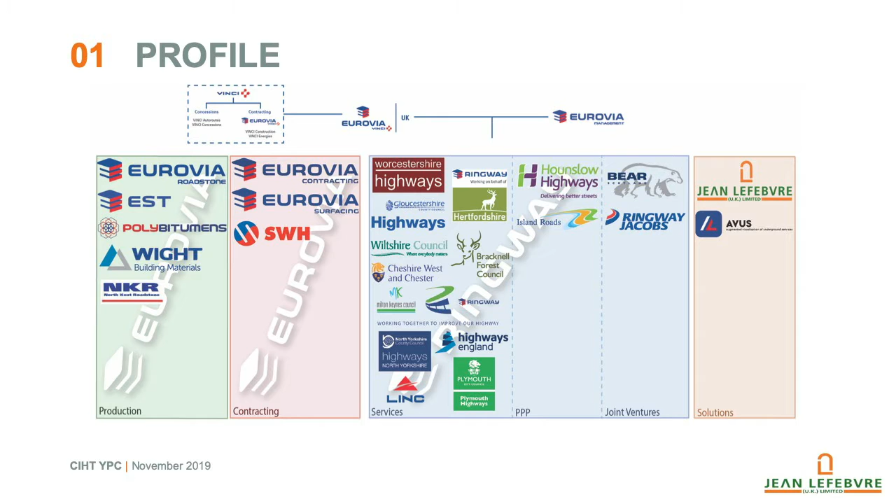So quickly, I'm from Jean Lefebvre, which is the consultancy division of Eurovia in the UK, and we cover all aspects of highway materials really. So material production and design, contracting, some term service and PPP or PFI contracts, and then a couple of joint ventures, Ringway, Jacobs and Bear in Scotland. So we cover the full area of the UK from Scotland to the Isle of Wight and everywhere in between.

So the first point I wanted to touch on with sustainability is it's all very well using recycled this and recycled that and not having any virgin material in. But if it only lasts half as long, then really is it any more sustainable? So one of the main points that I think we should be looking more on is asset management and sustainability in terms of financial as well.

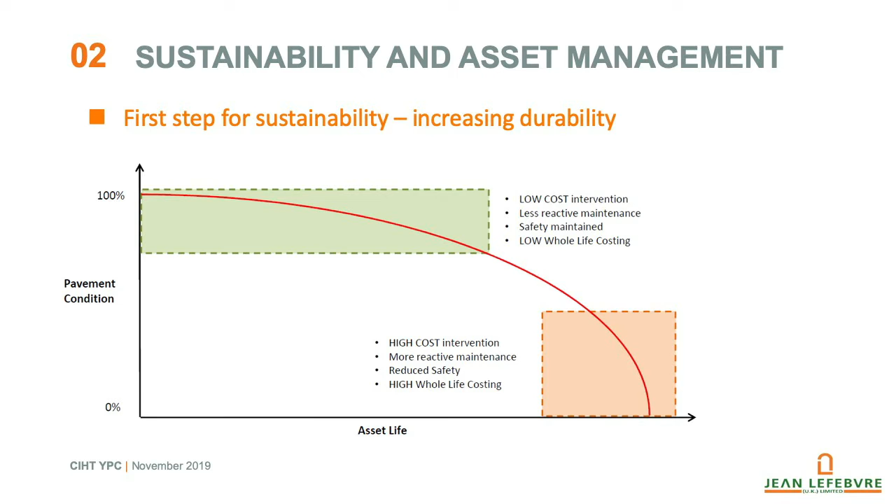So looking at a low-cost intervention that's less reactive maintenance, so less impact on your clients, on the residents of the general area, and looking at the whole life costing by having an intervention early on, instead of waiting for a high-cost intervention that's more reactive maintenance, reduced safety. So compared to the previous example, if we have minor interventions, so using other treatments such as surface treatments, resurfacing, rather than just waiting for a deeper treatment.

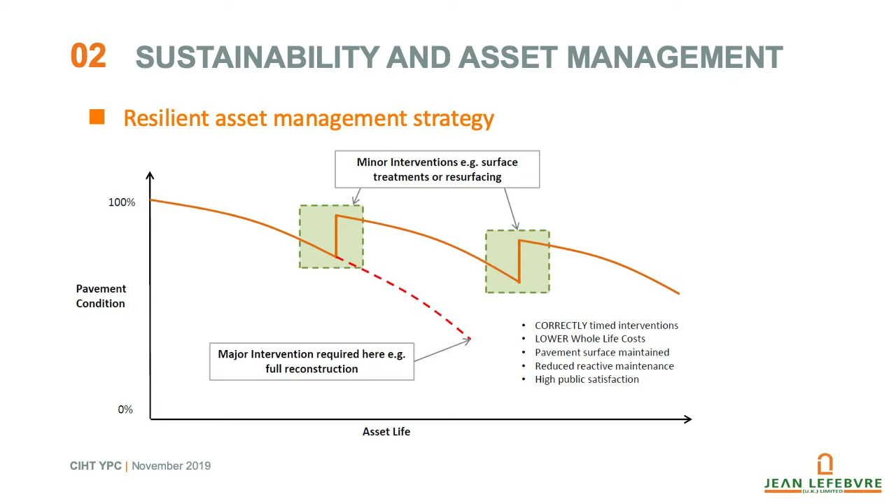So we're looking at correctly timed interventions with the right material, having a resilient asset management strategy with the known asset condition. So I think it was mentioned in the first presentation today about actually can we know the condition of our material and treating it based on condition rather than just a timed intervention. And then we can increase our social sustainability by having a higher public satisfaction. So one of my key points is they're not exactly the same, but they are intrinsically linked.

Today is World Quality Day, just as it happens. So can we increase the durability of our products through increased quality, whether that's looking at the temperature we're laying it in, how we're laying it, how we train our crews, the type of material and aggregate we're using, do they actually link together? So if you can make the same material last half its life again, you've already made a 50% CO2 reduction. And I nicked this from Gorilla Tape, I think, but I think it says the point I'm trying to make. Can we be tough through the extreme conditions that we have?

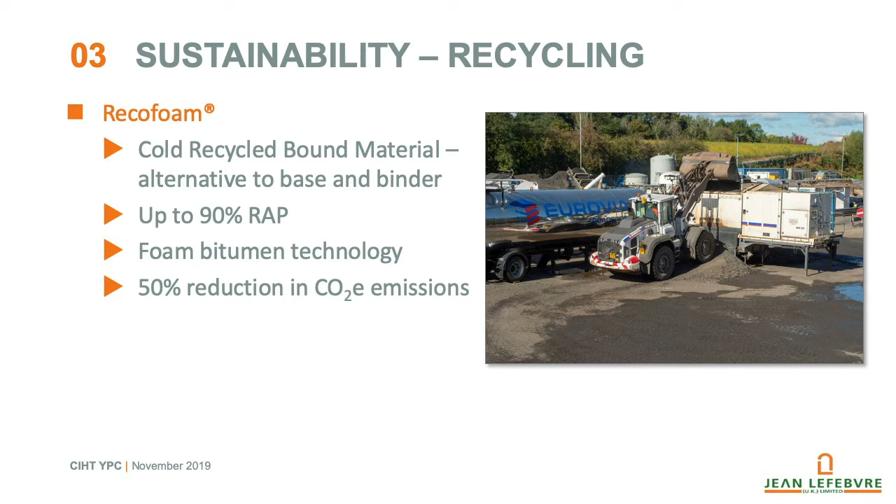So now, looking on actually what you might call sustainable materials or something a bit different. So many of you may have already come across a cold recycled bound material. In Eurovia, we call it Recofoam. And that's a type of material where you can use up to 90% RAP. So it's a common way to utilize recycled material within the carriageway in the base or binder course. So it is installed at ambient temperature. So you've also got the CO2 saving from not heating the material.

And it's also got the benefit of being able to incorporate waste products such as incinerator bottom ash that you obviously get from incinerator products, but also to encapsulate asphalt waste containing coal tar. So some of you might be aware of the long-term issues that we might face with coal tar products. It was identified as a carcinogenic product, and so we now don't heat the material. So if we want to use it again, we need to incorporate it in a way where we can use it at cold temperature. And that's how Recofoam or cold recycled bound materials can do that. It's also got the benefit of preventing it going to hazardous waste.

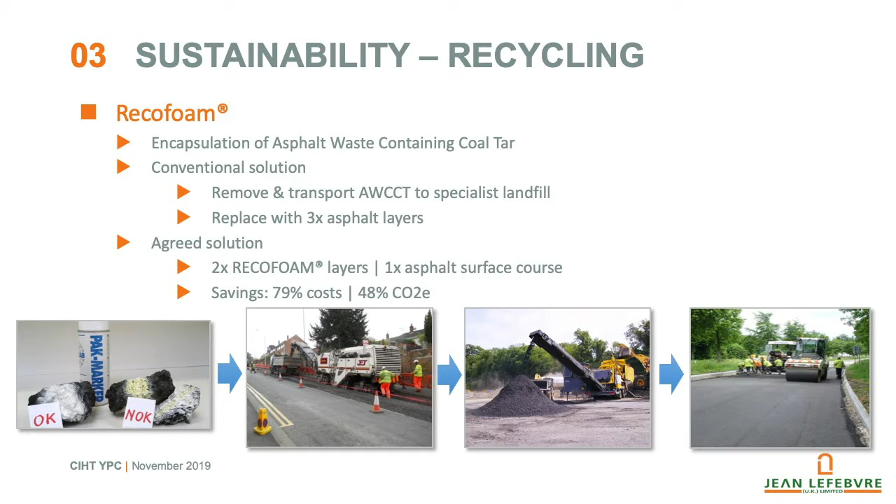And so instead of a traditional solution where you would remove your hazardous waste coal tar and take it to landfill and replace it with virgin asphalt material, we can now do a base and binder course of a Recofoam layer and then top it off with a virgin asphalt surface course. And that not only gives the CO2 savings, but it gives you an 80% cost saving as well. So that's where we're looking at not just sustainability in terms of environmental, but sustainability in terms of our financial requirements as well. And so we can identify the tar, then we can split plane it, so make sure you can plane separately your hazardous material from your non-hazardous material, making sure that, again, we're not creating a longer term issue for ourselves.

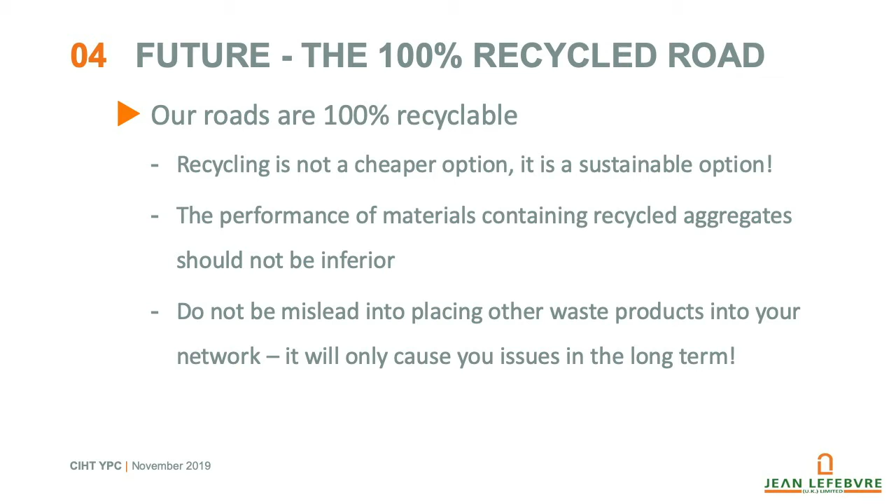But looking at the future on that, can we go even further? And so the future is a 100% recycled road. And I mentioned it earlier, recycling is not necessarily a cheaper option, but it is a sustainable option. We've got to get over the issue that a recycled road is inferior. It doesn't have to be. It can be just as good, just as long-lasting, just as well-performing as a road using completely virgin materials. And another thing, don't be misled into placing other waste products into your network. If you were in the first session in here, Helen mentioned it earlier, there's an awful lot of press about can we reuse plastics here, there and everywhere.

But if we just chuck a load of plastics into our road, one, is that actually giving us a benefit in the durability of that material? But two, is it just causing us a further issue down the line? How are we going to reuse that plastic material? Do we have an issue of microplastics from runoff of plastic in the asphalt?

So I think it's a very easy way to gain press attention to just say, yes, we can reuse plastic or other materials, but we do need to think about our longer term implications. So there has been a trial of the 100% recycled road. As you can see in the binder and surface course, it's not quite strictly true, but anyway, the marketing guys say it should be 100%, so we'll keep it like that.

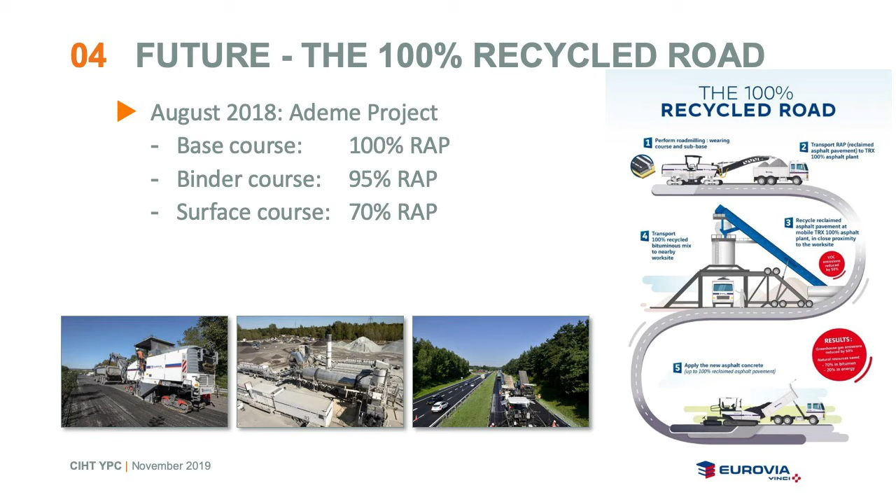But this was a project in southwest France that was for the Route du Futur, excuse my French pronunciation, project. And this uses a parallel drying flow to effectively granulate your recycled material down into its constituent products. So it's actually taking your very expensive, high-quality aggregate that you might have in your surface course and taking it back to the coarse aggregate section. Because if you granulate it down, you can then refractionate your asphalt material into the coarse particles, your fine materials, and so on, all the way through.

So you can recover your high PSV, expensive asphalt that, okay, one side of the aggregate might have been polished during trafficking for the last 10 years, but you've got maybe 30 or 40 mil of that really expensive aggregate that's never been open to traffic. And it's such a waste to just chuck that back into a base or binder course where we're not achieving its value.

So there's an awful lot of research, and other companies such as Conway are looking at it as well. How can we prove that these materials are just as good as they were 10 years ago when we first put them in? And so one of the issues we're looking to research and to prove is how can we make the binder perform as well now as it was. And so that's why maybe in your surface course you're not quite up to 100% because of the oxidization process and the aging process that bitumen will go through due to its exposure to UV light or to oxygen.

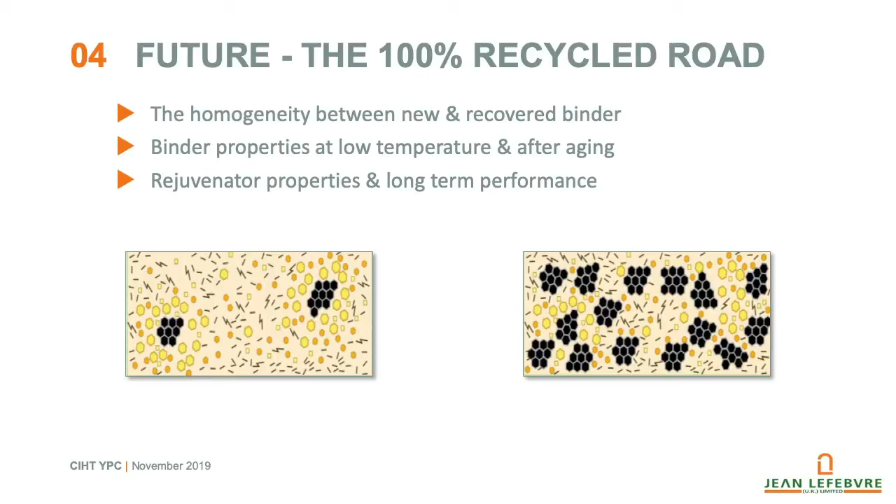But what could happen is you get your old bitumen, and then you just get your new bitumen coating around the edge. But what we need to do is to try and develop our bitumens and develop our mixing process and manufacture process of the material so we get the homogeneity. So your old bitumen can mix with your new bitumen and give you that long-lasting performance. There are various different ways you can test that, all of which are way too technical for me. But effectively, you're trying to prove that it's not brittle and also it's not too soft that it ruts. So you're looking for that perfect middle point.

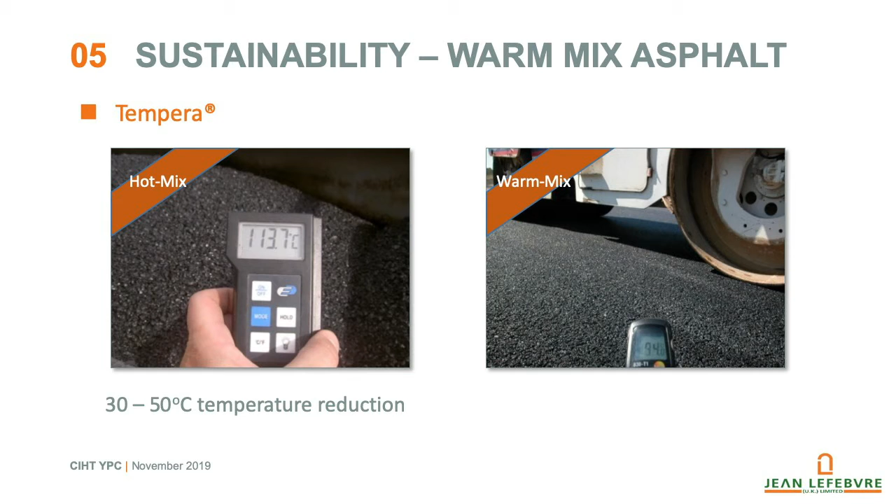So moving on a little bit to another sustainable topic is warm mix asphalt. So you may have heard of warm mix asphalt before, but this is producing ordinary asphalt as you and I would know it, but at a 30 to 50 degree temperature reduction. So there are various ways of doing this. Eurovia call it a Tempera material, but again, it's widely used out there. And you can use an additive to increase the adhesion between the bitumen and the aggregate, and also to increase the workability of the material. So you get that workability, but with a lower temperature.

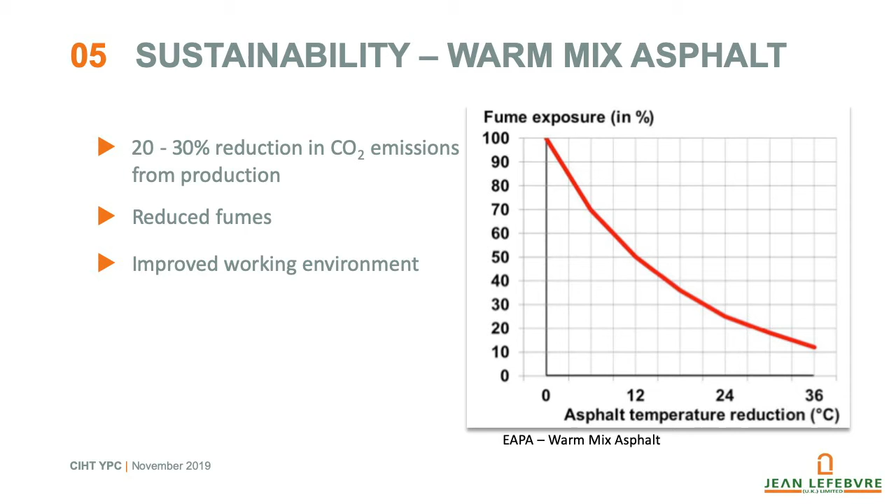And so with your reduction in heating, you're not only reducing the temperature you mix it, but you're reducing how much energy has to go in to heat all the aggregates, heat all the plant up to that temperature. And so as part of that, you can get up to a 30% reduction in CO2 emissions just from the reduction in temperature. You've also got that increased benefit with cost as well, because you're using a lot less energy. A really important benefit of this is reduced fumes. And this was touched on in our air quality requirements in one of the presentations earlier on. But for every 12 degrees in asphalt temperature reduction, you get a 50% reduction in fumes. So for the guys working on the site, that is a major benefit to them.

I think in the future there's going to be an awful lot more regulation about what we are subjecting our operatives to on the site. And there's going to be an awful lot more testing as part of that. And so if we can, it's quite simple, just reduce the temperature, we're already giving them such a better working environment to be in.

An additional benefit I mentioned earlier: if you have an oxidized or old bitumen surface, it can get stiffer and more brittle. One of the ways that happens initially is through the mixing time. A bitumen is categorized on its penetration grade, so the softer it is, the higher the penetration value. During its storage in the tank, it will slowly oxidize and get a bit stiffer, but it's nothing to worry about. Then during your mixing time, when you heat it up, it oxidizes, becomes stiffer, and you drop a few penetration grades ready for when you lay it.

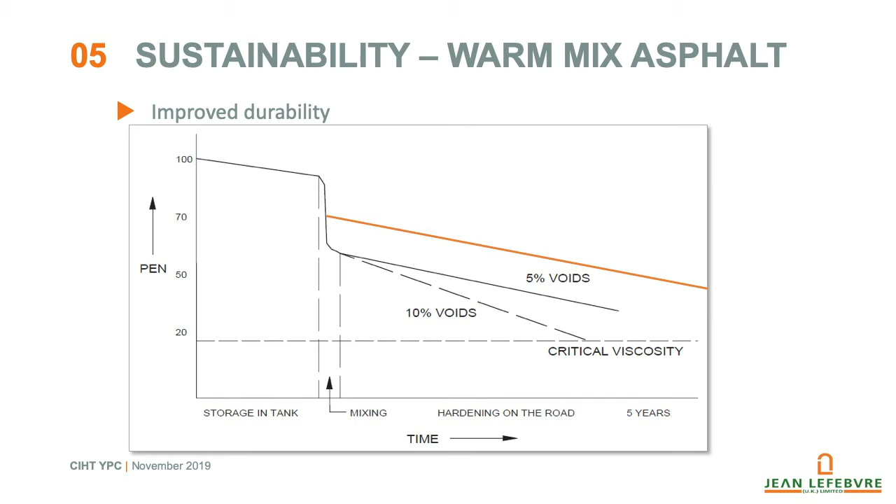Moving on to my final sustainability topic, moving away from the environmental and more onto social sustainability. There is a massive issue at the minute about noise, and it's starting to gain more traction. In the UK, 12 million people are affected by noise pollution. We're all affected by noise, but this is to an extent where it's having a detrimental impact on their health. Prolonged exposure has been proven to affect child development, and to cause increased stress levels, higher blood pressure, and heart disease.

You've got your engine noise, but one of the biggest impacts on road noise is from the air pressure being blown out by the tyre and the interaction between the tyre and the road surface. As the tyre comes round, the air is pumped out and it creates that rushing noise that you'll hear either at the side of the road or in the car itself.

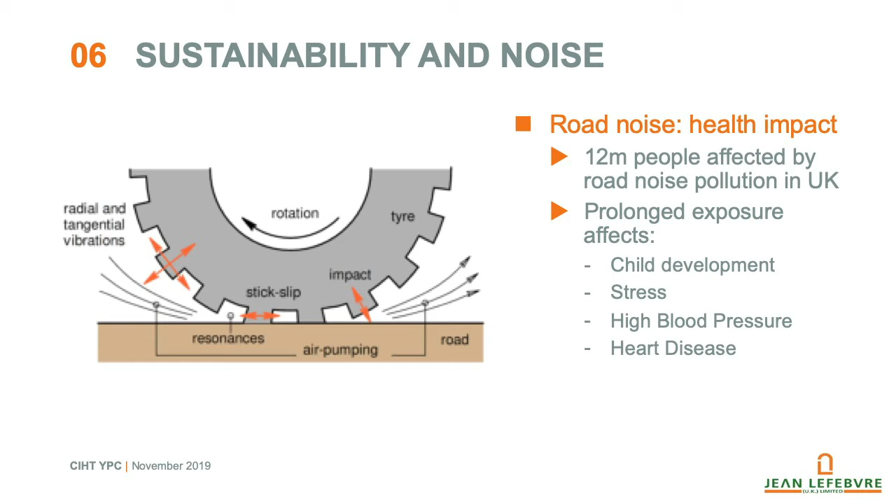One of the ways we can address this, branded Ultraphone at Eurovia, though there are many other options, is through a low noise surfacing. There are different ways to reduce the noise output from the road surface interaction with your tyre. This particular example uses a 0 to 6, which means the aggregate range is from 0, or very small, to 6 millimeters. It's gap graded, meaning it's a voided material with interconnecting voids. The air pressure then has somewhere to go, and it can be absorbed by the void network, the large number of small voids within the asphalt.

Using the 6 mil aggregate has the added advantage of giving you enhanced skid resistance, because you have a lot more areas of interaction with your tyre. Each individual area is smaller, but there are a lot more of them, so they produce a greater level of friction between your tyre and your aggregates. This particular material gave us almost a 6 decibel noise reduction, which is equivalent to a 75% reduction in traffic.

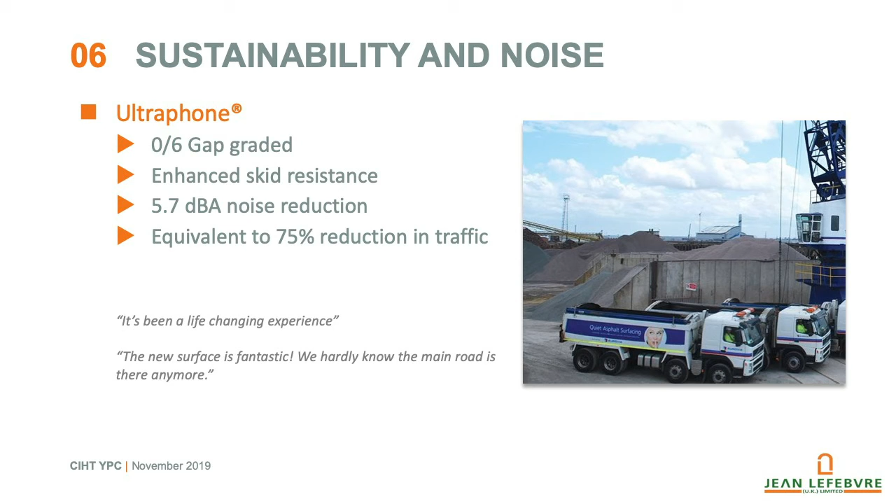So a very quick run through, and I hope you don't feel I've rushed it too much, of the different potential options out there. There are now so many more options, so many different recycled materials we can use. But one of the biggest things I would encourage you to take away is that there's no point being sustainable with your recycling, with your use of hazardous products to prevent landfill, if your material is not going to last as long. That's something we really need to get across to the industry and to the guys on site: quality is important. Not just for sustainability, but for our industry to move forward and to show that we are taking this seriously.